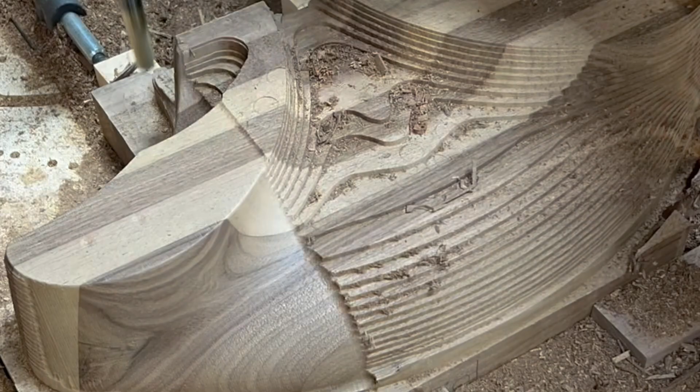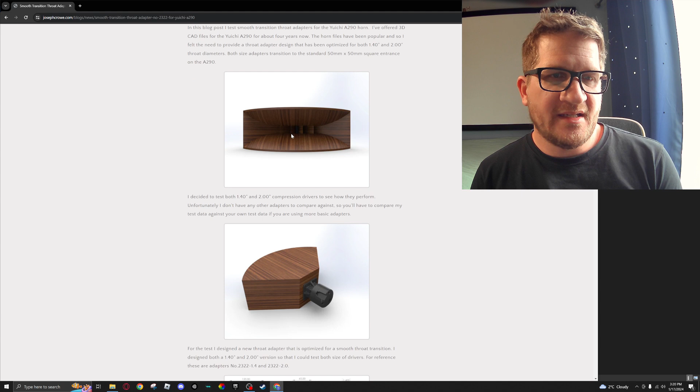Hey everyone, welcome back. In this video we're going to be looking at the Yuichi A290, and this is a bi-radial horn. I've offered the 3D CAD files for this on my site for about 4 years now, and so this video is going to be looking at some actual test data.

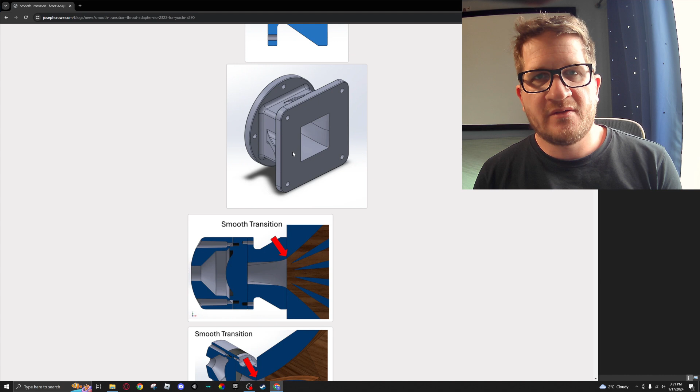So we had built these on our CNC, and we also 3D printed some custom throat adapters to help smooth the transition. So normally the horn has a square entrance on the horn throat, and so we've just printed these adapters, which are also available on my site to download if you want to 3D print these.

And so the idea is that it provides a smooth transition from the circular throat of the compression driver going into the square 5 by 5 centimeter throat entrance. And so you can see here the pictures are showing that it has kind of a lofted extrusion that produces a smooth physical geometry in the throat there.

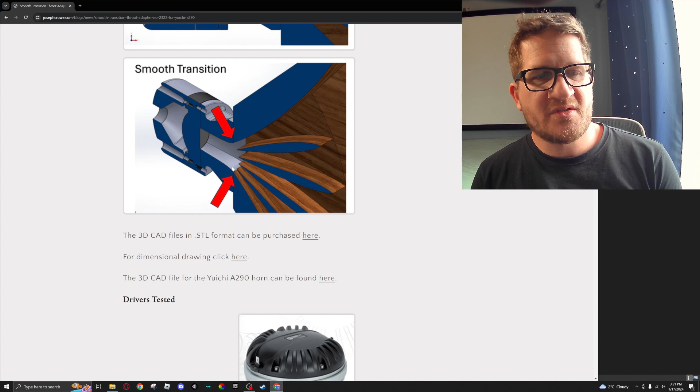So the horn is a 300 hertz cutoff. It's been around for about 4 decades, and it's quite popular for large format studio monitors kind of back in the heyday, and people also use them in home audio 2-channel listening. And so the idea with this horn is that it provides wide horizontal off-axis coverage.

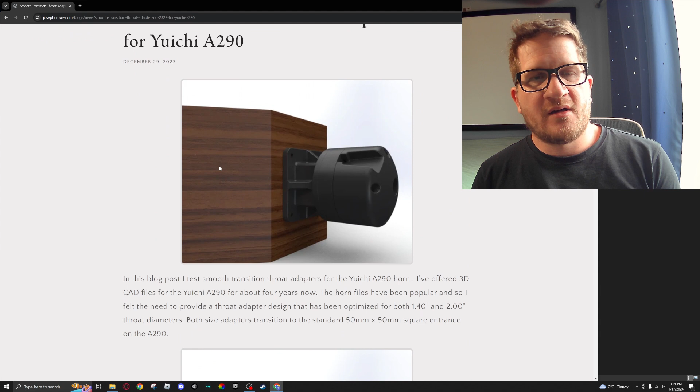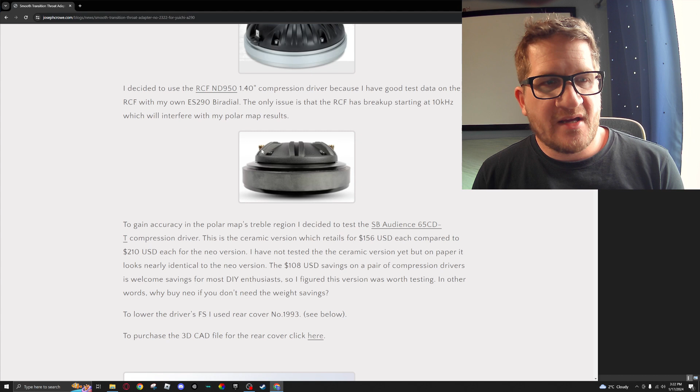And so in this video we're going to test 3 different compression drivers using the throat adapter in either the 1.4 or the 2-inch throat. The compression drivers that we'll be testing today are the RCF ND 950 shown here, which is a 4-inch voice coil titanium diaphragm. The other compression driver is also a 1.4-inch throat. It's the SB Audience 65CD-T, which is a 2.5-inch titanium diaphragm.

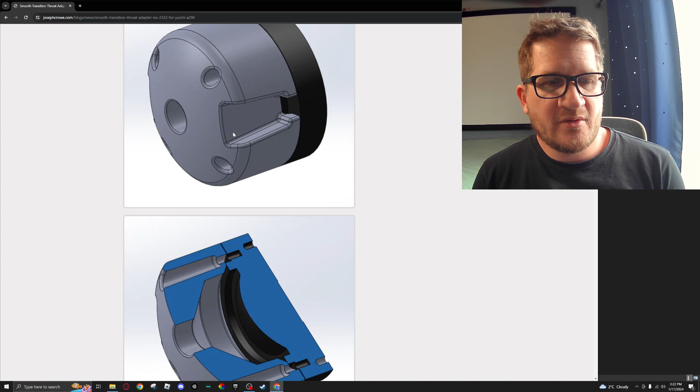And then we're using our rear cover. So this is also available on my site as a 3D CAD file for 3D printing, which is going to enlarge the rear chamber. So that lowers the FS of the compression driver from about 450 hertz down to about 290. So you can see here it just enlarges that rear chamber, and then it provides a venting out the back. So the 3D CAD file comes in 2 versions, a completely closed off version and also a vented version.

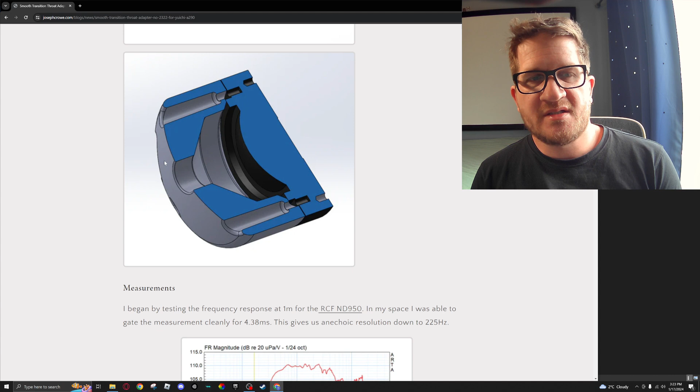So the vented version will be the default version that you would use unless you're using it inside of a bass enclosure where there's air pressure that you need to seal against, to protect the compression driver against the air pressure inside the bass cabinet. So okay, we'll get right into it.

So to start off, we mounted the RCF ND 950 1.4-inch throat compression driver onto the Yuichi A290, and it produced the following frequency response. So it's using a 4.38 millisecond gate, and so the response you can see here has a bit of a downward trend, and we're about 10 dB down at 10 kilohertz.

And then we have the normal breakup that you would see with this compression driver coming into play. So this is more typical of what you would see with the constant directivity style horn, where it has consistent wide upper treble coverage. And so this isn't really an issue per se. It's more that the energy of the horn is being distributed off axis instead of on axis.

And so with my ES bi-radials, they have a narrowing directivity as you move up into the upper treble, which provides a flatter frequency response on axis. Okay, but if you were to use a horn that has wide coverage in the upper treble, so above 90 degrees and up to like 120, then you're going to see a falling response on axis because that energy is being redistributed to the off axis.

Okay, so it's not that the horn doesn't load well in the upper treble, it's that it's being channeled off axis instead of being focused on axis. So the next compression driver that we tested was the SB65 CDT, and again you can see the falling trend. Now this peak here, I think it's at around 4K. This is part of the driver, it's not inherent in the horn, but we do have a very nice flat frequency response.

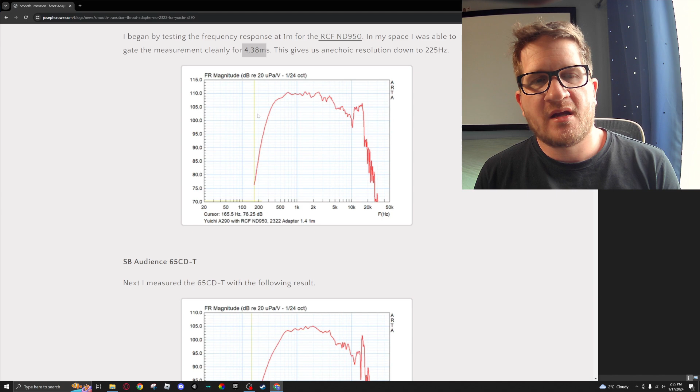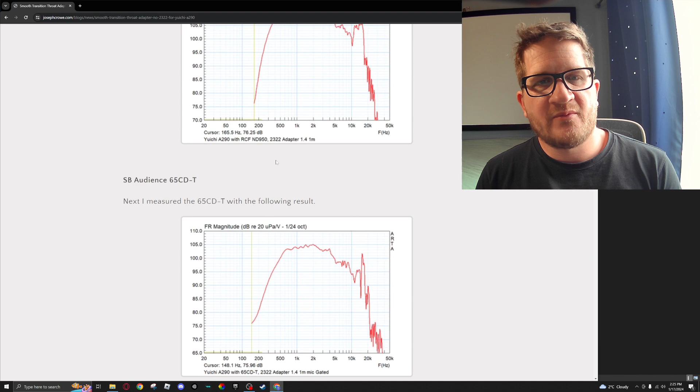Okay, so the 65 CDT, similar kind of frequency response, and then we have the breakup occurring at 17 kilohertz. And so this diaphragm is a 2.5-inch diaphragm versus the 4-inch on the RCF, and so it's going to have the breakup pushed up quite a bit higher as a result.

Okay, so just seeing here, I removed the gating just to show what's happening, and so you can see here near the cutoff of the horn there is a bit of a bump, and so we're left with a question of whether that's inherent in the driver or if that's an attribute of the horn.

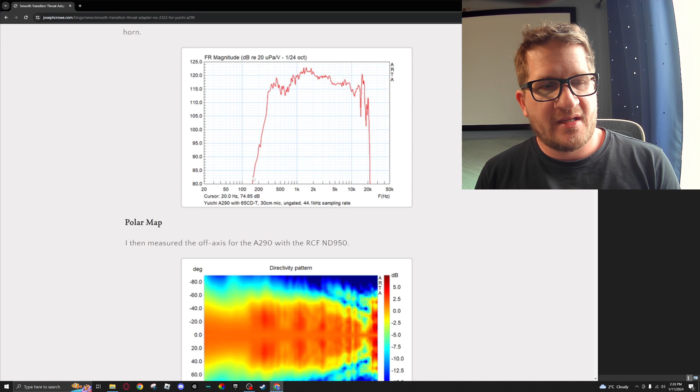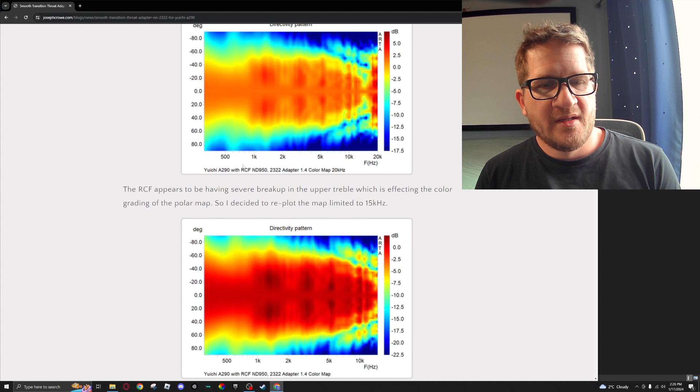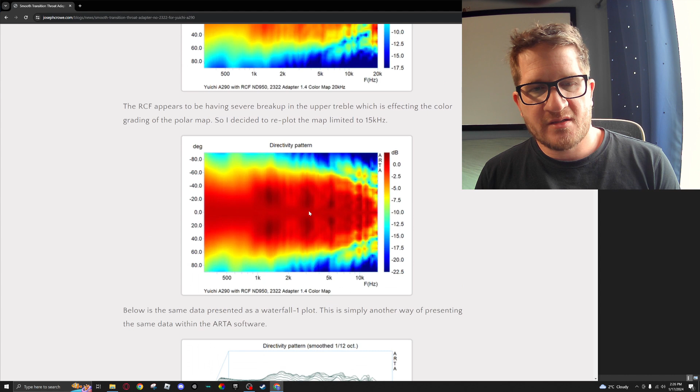Okay, so that's something that we're going to discuss in a little bit. So the next thing that's quite interesting, and there isn't any data on this horn online in regards to an off-axis colored polar map, and so I did measurements at 5-degree increments and produced this colored map. Now I had to limit the upper part of the bandwidth to 15 kilohertz, which is shown here, just so that we get the proper scaling.

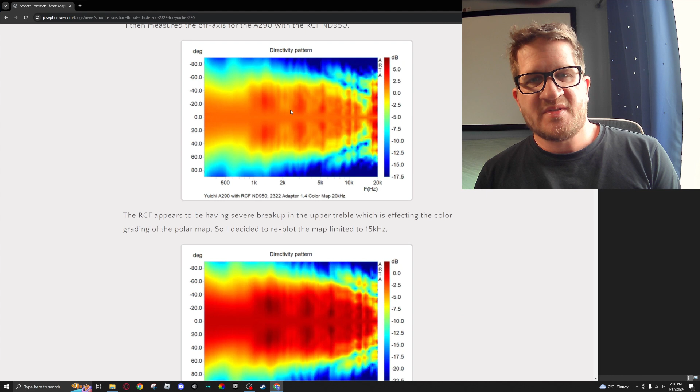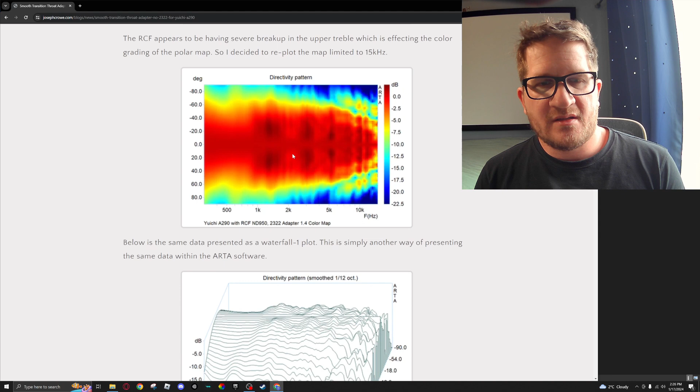Otherwise the breakup mode in the RCF ND 950 was causing some scaling issues with this polar map, and so by limiting the upper frequency to 15 kilohertz, it gives us a consistent color map to what you're used to seeing. So just to comment on the actual results here, we see a bit of a narrowing in the 500 hertz region, but then it stays consistently wide. You'll note that it is a 120 degree listening window right up to, we'll say, about 5 kilohertz, where we see it gradually start to narrow, and then by 10 kilohertz we're at about a 90 degree listening window.

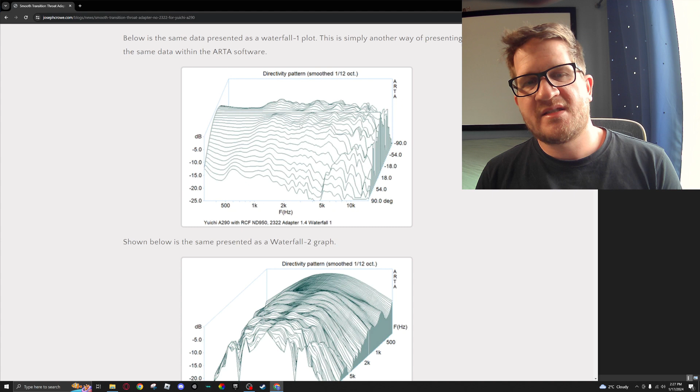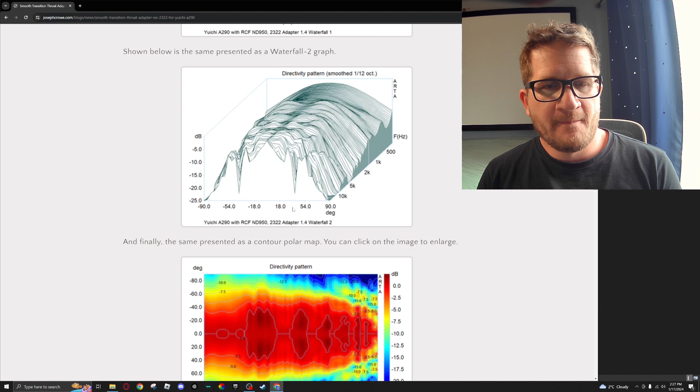Now as far as consistency, the waterfall 1 map within ARTA kind of clearly displays things a little easier as far as how consistent the off axis is with the on axis. And so you can see here, even with the waterfall 2 map, it's probably the better way to look at it. So as you move off axis, you can see some increase in output in various parts of the frequency spectrum. So at like 5 kilohertz there, actually, there's an increase in output as you move off axis. But generally it's wide, generally consistent off axis.

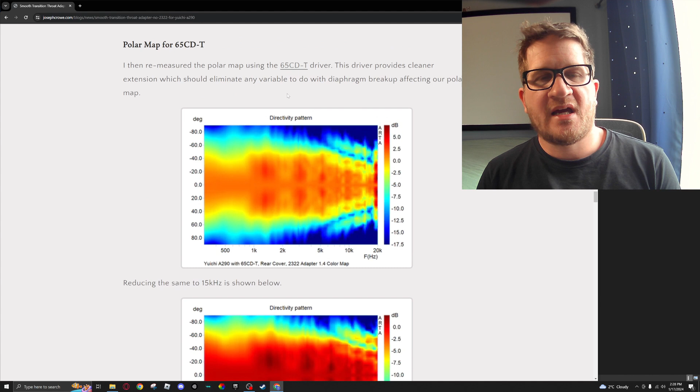So the next thing I did is I tested the off-axis colored polar map with the 65CD-T compression driver. So this is the one with the 2.5 inch diameter diaphragm, and so it's going to provide a little more accuracy in the upper treble simply because there isn't breakup until 17 kilohertz. And so I would say this colored polar map is a more true to life representation of the horn itself. Anytime you get breakup modes, it's going to affect the off axis of a horn just because it's completely out of control. You're going to get spurious sounds coming out of the throat at different directions, and so this is going to be more representative of the horn itself.

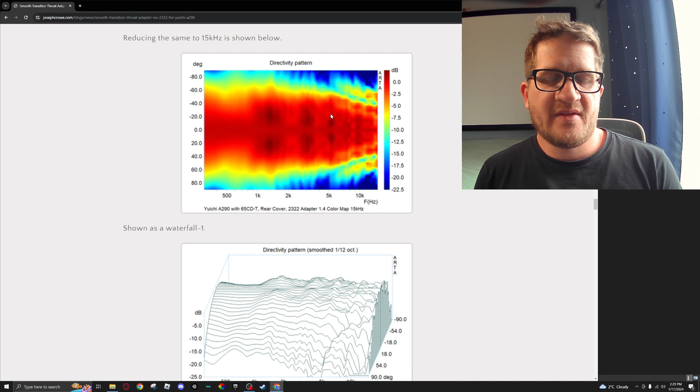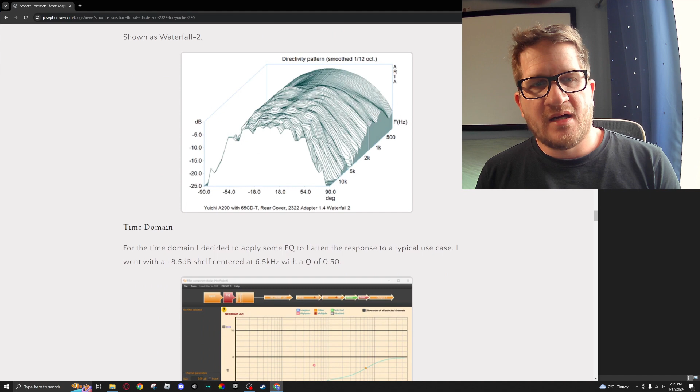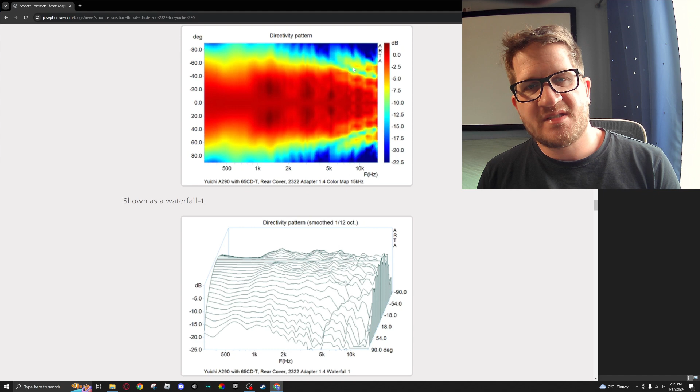And so showing the same, the waterfall 1 and the waterfall 2 there, it's showing in the upper treble we're going to have some irregularities, but overall it's providing wide coverage. And then I think even more pronounced is the edge diffraction artifacts that we're seeing in the upper treble there at the 60 degrees off axis.

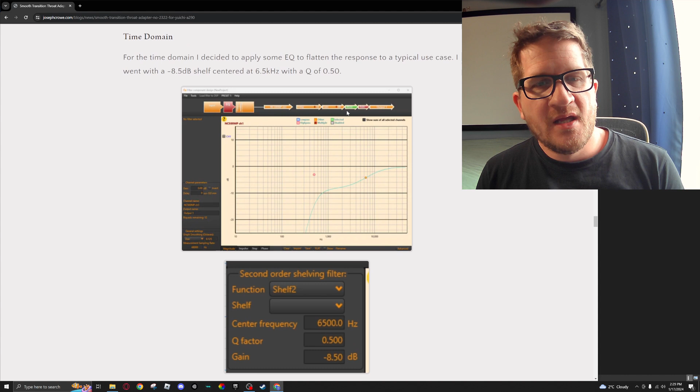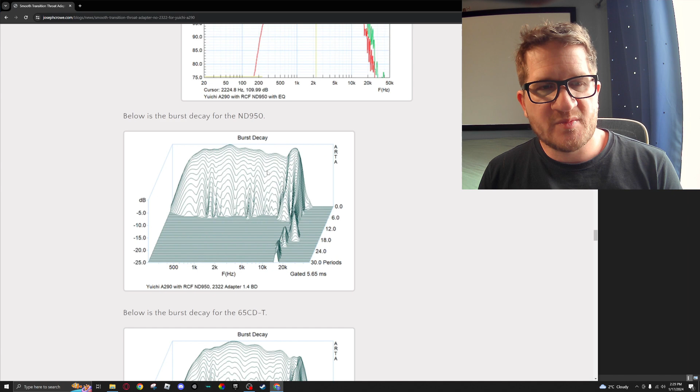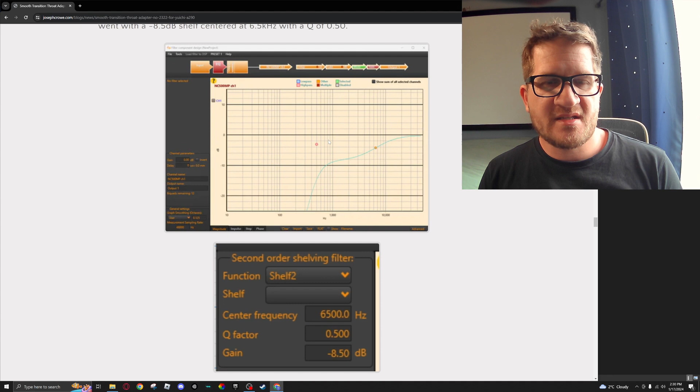Okay, so the next thing I did, in order to do time domain, like burst decay, waterfall, I like to apply some EQ to flatten the response so that we get more representation of a real use case, after the crossover has been applied and we have a flat response. So I applied an 8.5 dB contour circuit centered at around 6.5 kilohertz. So you can see here, this is the resulting effect of the contour circuit, and this is the overlay between the raw response in red and the effect of the contour circuit in green.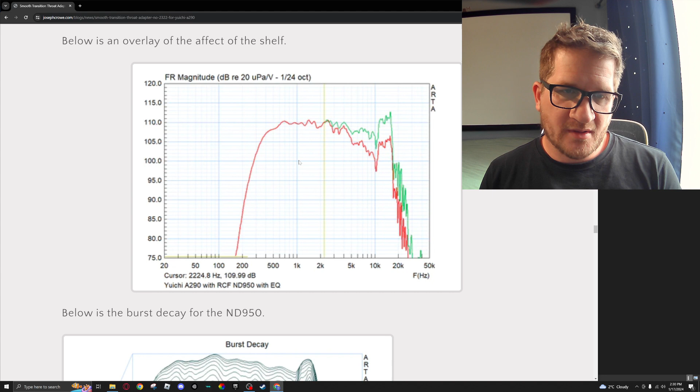And so this is the contour circuit that I had for all the measurements moving forward, so just keep that in mind. So the horn clearly does need some EQ, similar to what you would need with the constant directivity horn. And so that's just something to keep in mind when you're trying to implement a crossover for this horn.

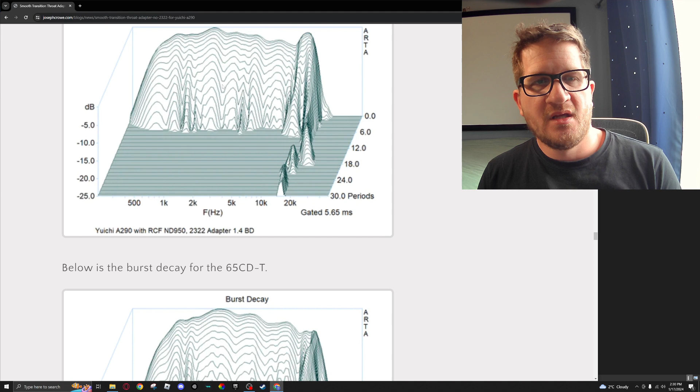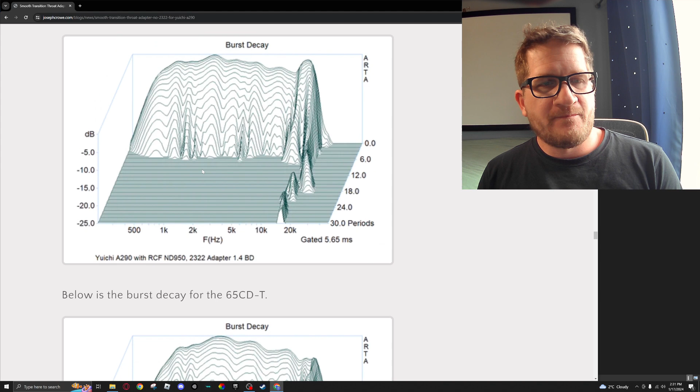Okay, so burst decay is not going to really show anything in relation to the horn unless the horn actually has significant resonances within the horn. And so what we would typically look at is just comparing the two drivers and seeing if something consistently shows up between the two drivers. And we do see a bit of a resonance occurring at around 1 kilohertz, even between the two drivers there. And so that might indicate that there might be a subtle resonance occurring inside the horn.

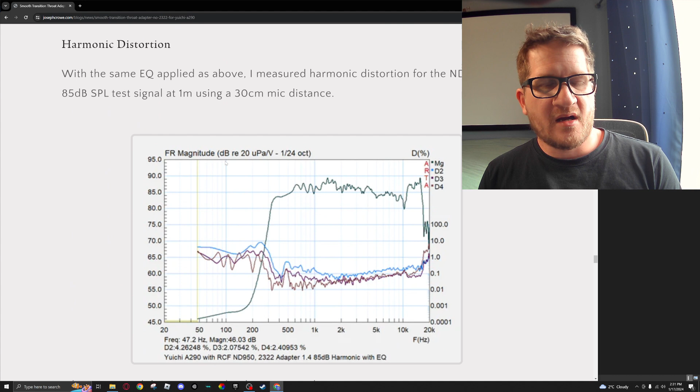The CSD waterfall for the RCF is shown. Nothing really of concern with that. You have your typical breakup coming through there. Harmonic distortion, so this is with the EQ applied. Testing it at, I believe it's 80... I'll just see here if I have it written down. 85 dB SPL at 1 meter.

And this is with the RCF ND 950. So you can see very low distortion, but you can see that the harmonic is trending upwards, and that's directly a result of the contour circuit EQ that we applied.

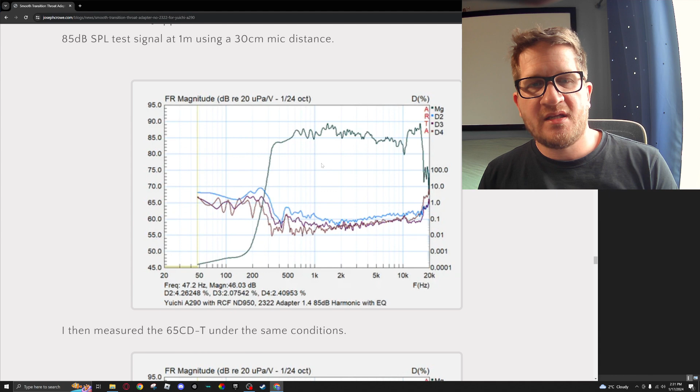And so that's something to keep in mind, that when you are applying EQ to the horn, you're going to get a proportionate amount of increase in distortion for the region where you're boosting that EQ. And that shows up very clearly in the IMD, where you see the noise rising in proportion to the contour circuit that we applied. So you can see here the 65CD-T, the SB Audience driver, is doing quite well for distortion. So subjective listening was actually quite interesting, and I want to be really careful how I explain this.

So it's really good that I had tested the two different compression drivers, because if I had just tested the one compression driver... I found an issue with the smaller compression driver, the 65 CDT. So even with the rear chamber lowering the FS to around 290 hertz, it still produced what I would call like a resonant sound character in the 300 to 600 hertz region.

And so if I had just tested the SB Audience compression driver, I would have falsely attributed that to the horn itself, thinking that the horn has first order reflections occurring near cutoff, but when I switched to the RCF ND 950, which is a larger 4-inch diameter diaphragm, the coloration went completely away. And so it wasn't the horn causing the coloration that I was detecting.

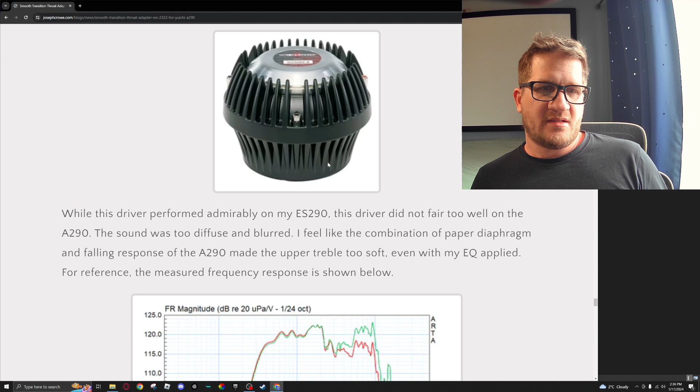So the other driver that I tested in this series was the DCM 50, which is a BnC. So it's the one with the paper diaphragm with the phase plug. It's a 5-inch diameter paper cone inside the compression driver. So this is the response of the DCM 50 on the Yuichi A290, and you can see here that with the EQ applied, it still had a pretty significant dip through the 3 or 4 kilohertz region. So this compression driver, I would say it did well as a mid only.

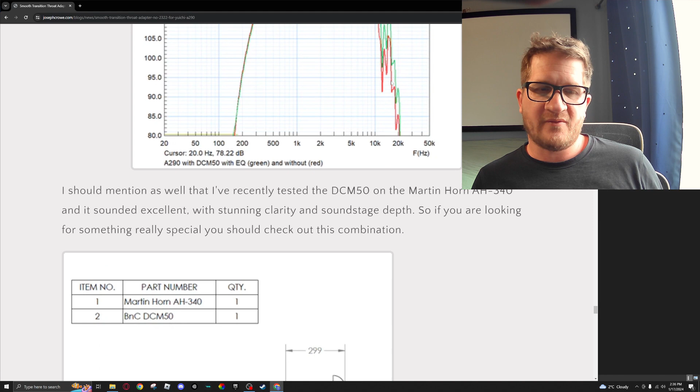The upper treble, even after the contour circuit, didn't have the clarity and resolution in the treble that I was hearing with the ES290 biradial and also the Martin Horn AH340. So I have the AH340 here as well, which is a 2-inch throat exponential with a rolled lip. And so this is a really good combination if you're interested. Highly recommended for point source.

It does upper treble up to 11 kilohertz, and there's a nice little peak there at 11 kilohertz where, at the end of the day, my hearing at my age, 42, I can probably hear up to maybe 13 kilohertz, so I wasn't really missing a whole lot of that last bit of upper treble. It's technically a mid-range only compression driver, the DCM, but it does actually quite well, covering the whole spectrum from, in this case, 340 hertz right up to 11 kilohertz. So that actually sounds really good on this horn.

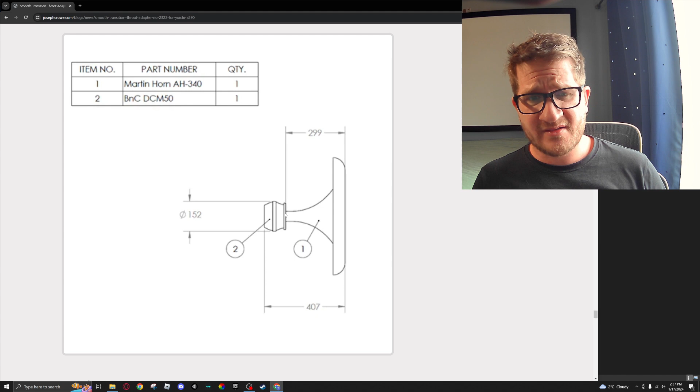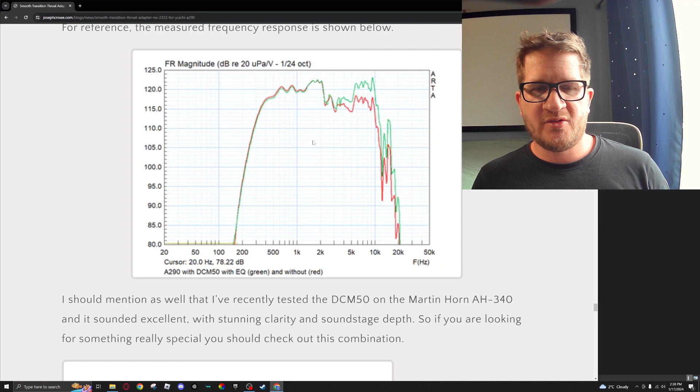Not so much on the A290. For whatever reason, I think mainly because of the way that it has that falling response, it just couldn't produce enough upper treble output to have a balanced sound there.

So the conclusion here: I did a little bit more testing with the SB Audience 65 CDNT or CDT. And I found that if you high pass filter at 500 hertz using an LR4 filter, that resonant sound character that I was getting had completely disappeared. And so if you're looking to use a 500 hertz crossover, I found that the SB Audience 65 CDT was completely suitable on this horn, providing great upper treble clarity, and it didn't require a super tweeter.

It was just overall a good driver, and it's been a consistent performer with other projects. As you know, I'm using it in a variety. So the 65, the Neo version and the ceramic version. I've tested both, and they both have identical response. The only difference obviously is the magnet. So if you are looking to save, I think it's around $100 per driver by going with the ceramic version. That's something that you might want to consider if you're on a budget.

But now with the RCF ND 950, that's the 4-inch diameter diaphragm, it does tremendously well. If it was me and if I had my preference, I would go with the RCF ND 950 and let it cross at 300 hertz. But there's some caveats with that, and I'll get into that. But I would use the RCF ND 950 with a super tweeter such as the Fostex T90A, and I think that would be a good solution.

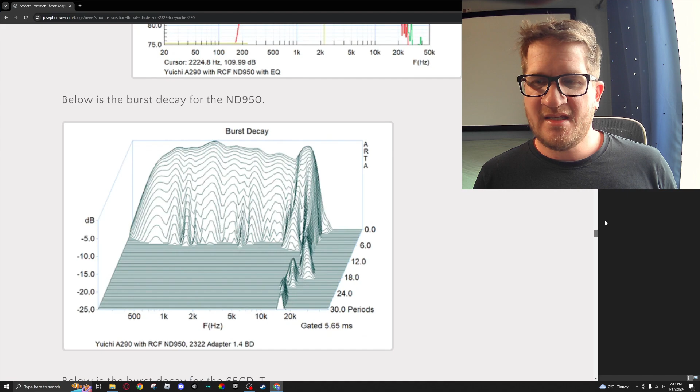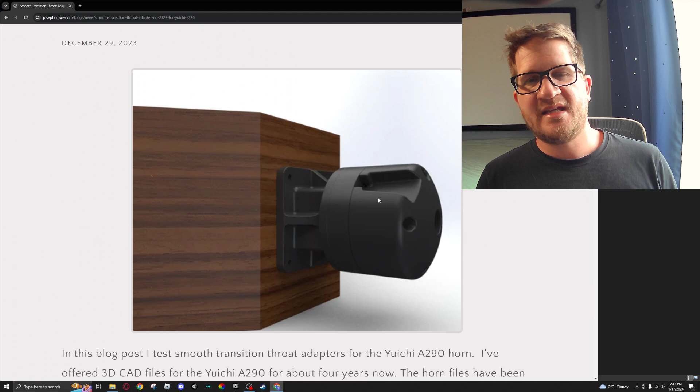So that's it, Yuichi A290. 3D CAD files are on my site for the special throat adapters, and also the rear cover for the CDT and CDNT from SB Audience. So I think I covered everything.